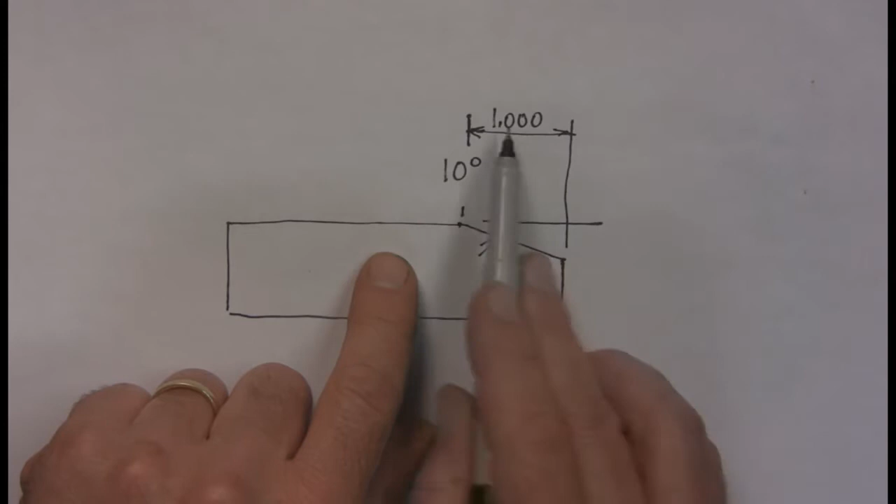Now, what is a ball dimension for? This is an intro tonight, let's talk about that. I've got this block we originally started this whole series with, and these guys want a 10-degree angle here, 1 inch down. How do we know this angle's right? Remember, first I taught you we're going to check it on a sine plate or some sort of gauge, and make sure our angle is 10 degrees.

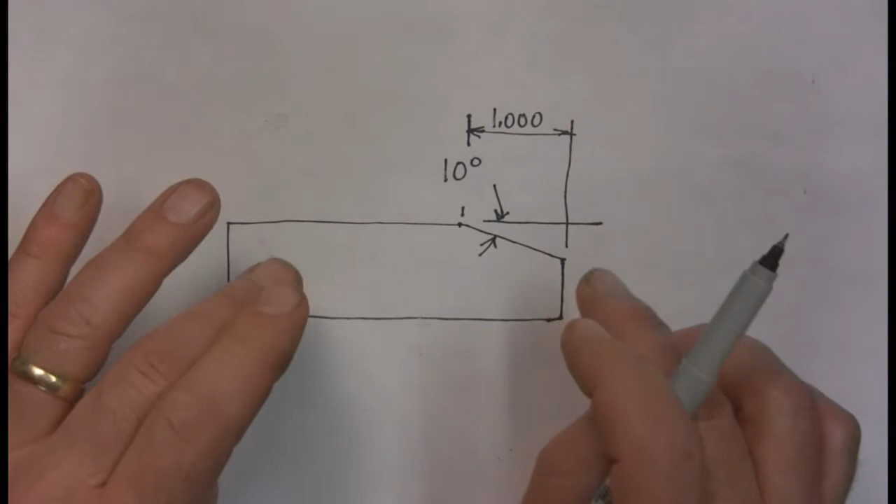Because if the angle's wrong, the ball dimension is going to come out wrong. So the first thing we need to do is make sure whatever we're doing this with—a grinder, a mill, a 10-degree cutter—that we've actually established the correct angle, or the ball dimension won't come out right.

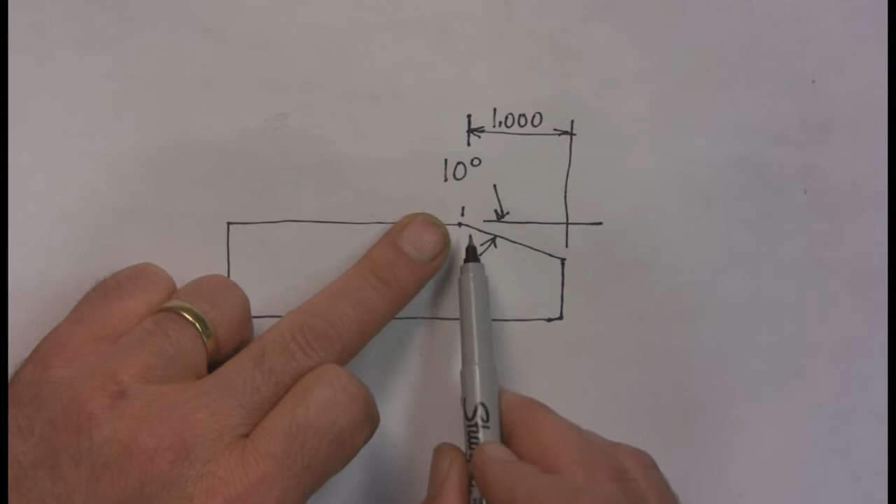So what's the purpose of a ball dimension? Here's what you need to know. How are you going to measure from here to here? Because they want this 1 inch. Now I know what you're saying: I could put it on a comparator, and yes you could. But this edge better be dead sharp, because if you deburr that at all around that edge, you can't find the sharp corner. So that takes away the comparator a little bit, because you don't have a sharp corner left.

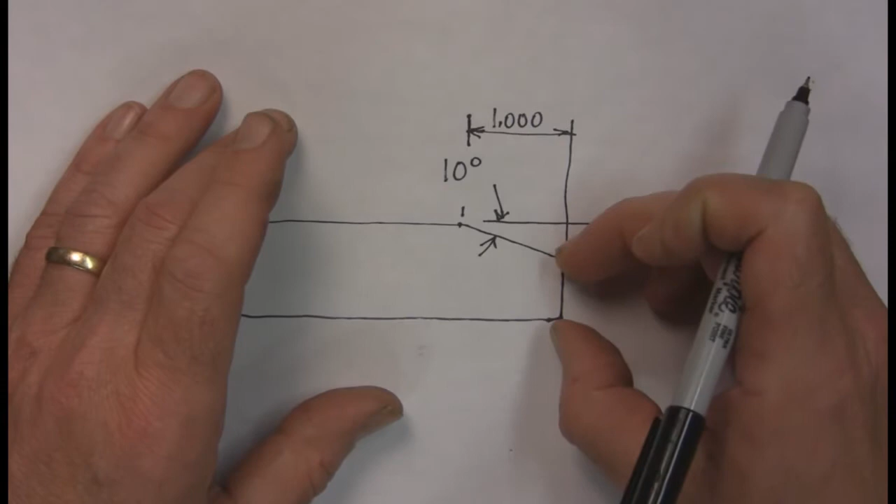To check this angle correctly on a comparator, everything's got to be dead sharp. As soon as you start filing off edges with a hand grinder or something, you've lost that ability. Now, the next way—if this doesn't matter, if this was a chamfer for weld—you could scale this, put a pair of Verniers on it and see, that's about what it is. So here's what you've got to do.

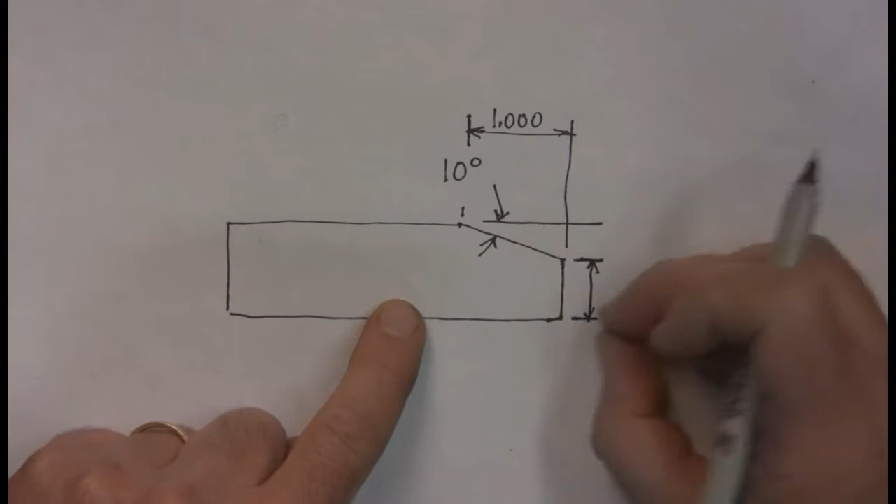First thing, if I were doing this, you have to know a few things. They want this 10-degree angle held here, and to do a ball dimension correctly, you've got to know the thickness. What we really want to know eventually is this dimension—when I'm all done and I check this, what's it supposed to be? That's very simple. Let's go back to our first lesson.

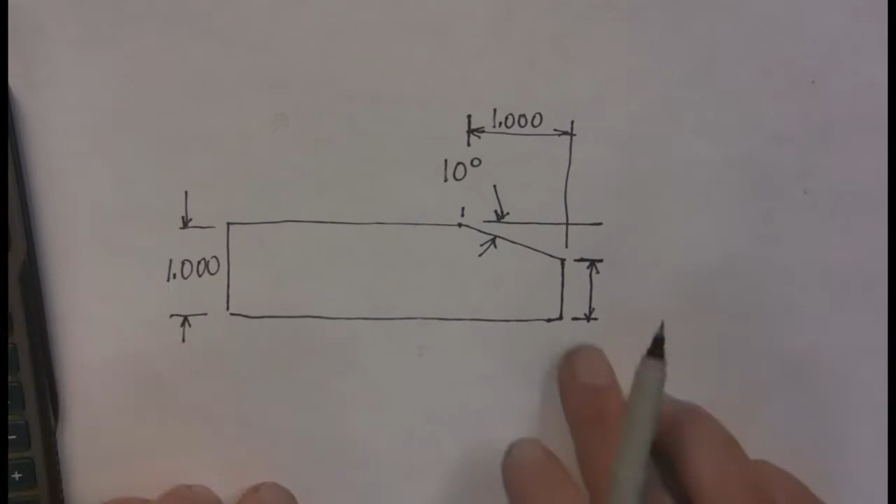So first thing we need to know is the thickness of this part. Let's just call this a 1 inch thick part, okay, that's what it looks like on the print here. So 1 inch thick part, what's left here? Well, we know here's our triangle, right guys? We know we've got an adjacent side, and we know we have a tangent, or a 10-degree angle.

So that's the simple formula to drop in an angle—remember that lesson. So, 10 tangent, and of course I'm going to multiply it by 1 inch, but it doesn't matter because it's the same thing. The drop in the angle is 0.176. So if I hit my plus-to-minus key, that makes it a negative number. Plus 1 inch equals this distance right here. This is what we've got to know: 8, 2, 3, 6, 7.

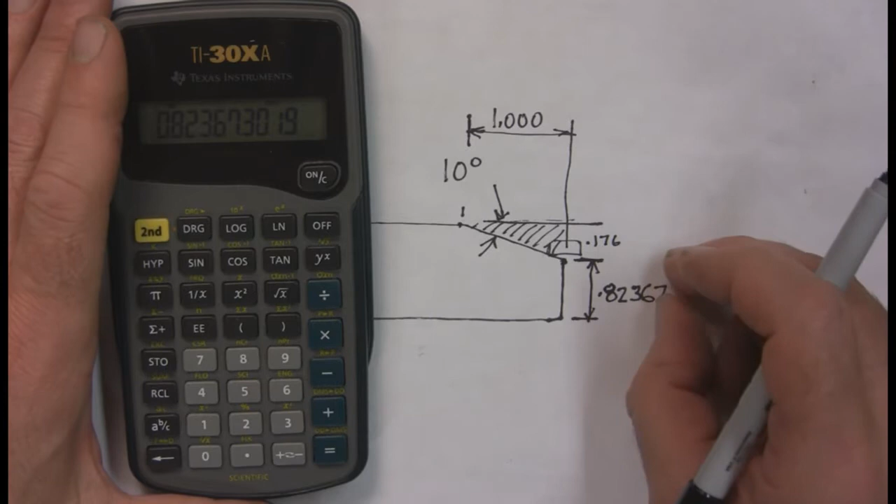How are we going to check that? How are we going to do that? Again, comparator, yeah, as long as you don't roll this edge over. But there's another way to do it. And you can't put a pair of mics over this, because your mics have a thickness to them—they have an anvil, and depending on where your anvil hits, you're not going to get right to that edge. You just can't do it. Again, it depends on your tolerance, but anything closer than plus or minus 10 thousandths, you need a ball dimension, okay?

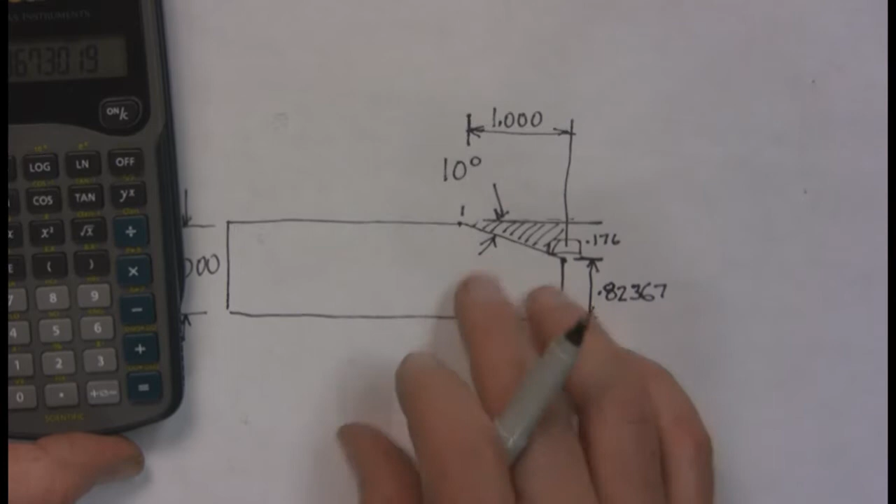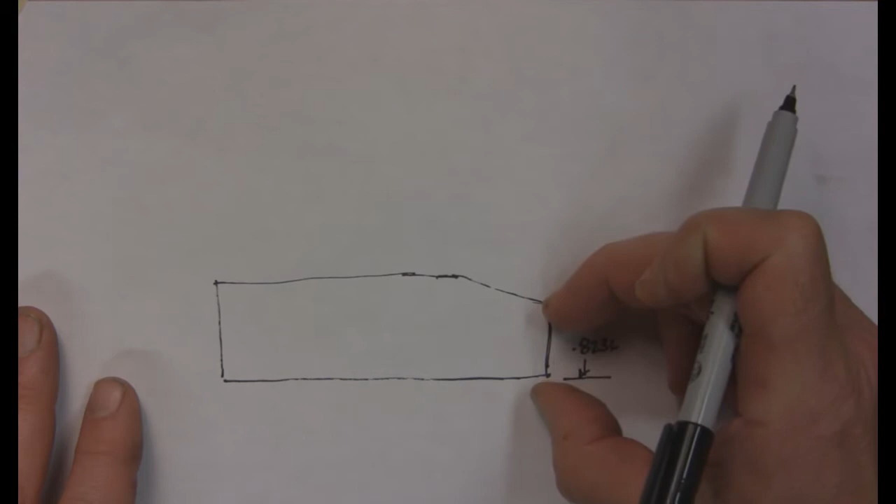So let's take the same part now, and I'll redraw it, and we're going to learn how to do a ball dimension. Back to the redrawn part, we now know this dimension here using our simple trig formula, 0.8236. And we know this is a 10-degree angle, and we've checked it with a dial indicator on a sine plate or whatever, and we know now that this is 10 degrees. Got to be 10 degrees, and you'll understand why—I told you already why you can't check it with a pair of mics or verniers, because you just can't get your mics right to that tip.

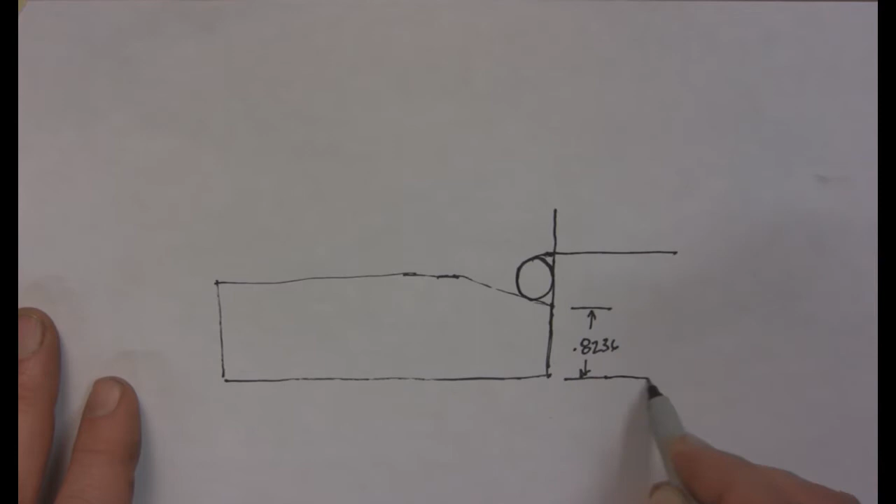So what we do in that case is establish a plane - you put a magnet here and a ball bearing, you put a ball in here, and there's your ball dimension. What we need to know is the distance from here to here. That's how you check an angle correctly. Makes sense? It really should.

Now, if your part's small, you can put a little magnet on there and drop a ball bearing in there, as long as you know the diameter. You've got to know the diameter of the ball - should be nominal, 1/2 inch, 3/8. You can do whatever you want, but a nominal thing.

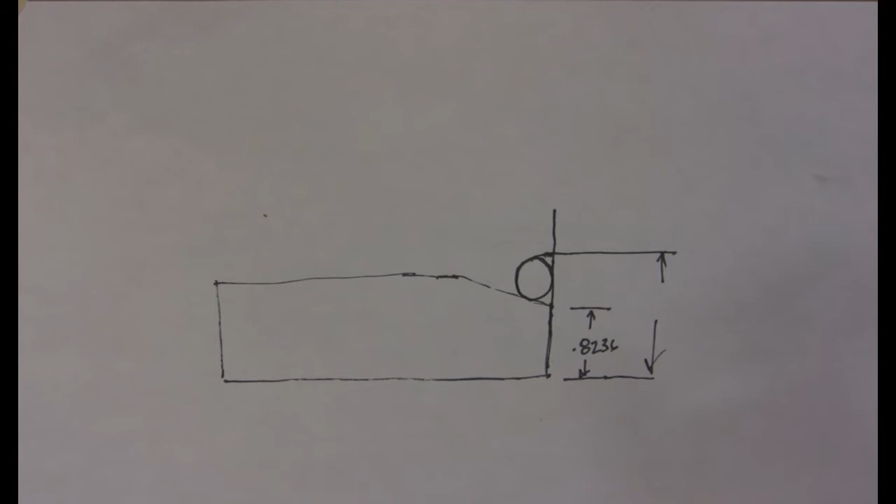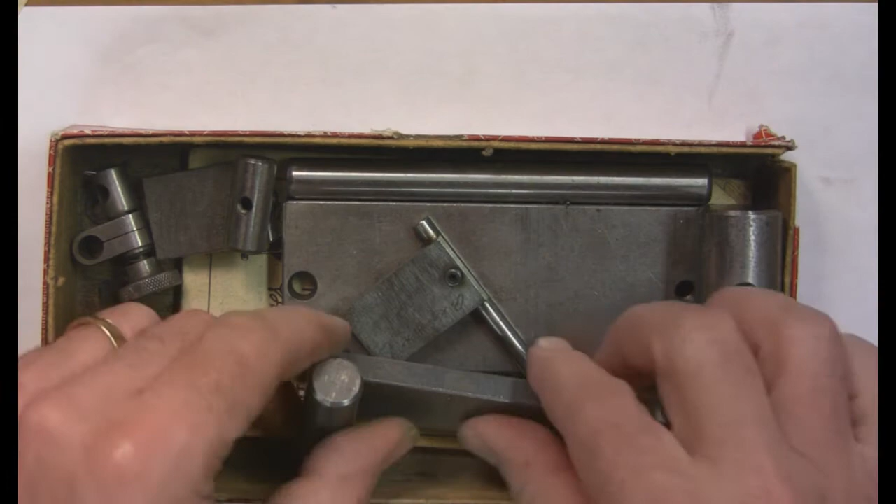So here's the deal, I'm going to show you these. Not too many people get to see these. This is my personal set of ball dimension rolls I've made over the years, different sizes, mounted to a plate. I can put this plate up against something, and then I have something to mic over. I can loosen this bolt and move the plate around. This is a 1/4 inch plate, a little piece of 3/16 steel that I took the time many years ago - looks like about an 832 punched in there.

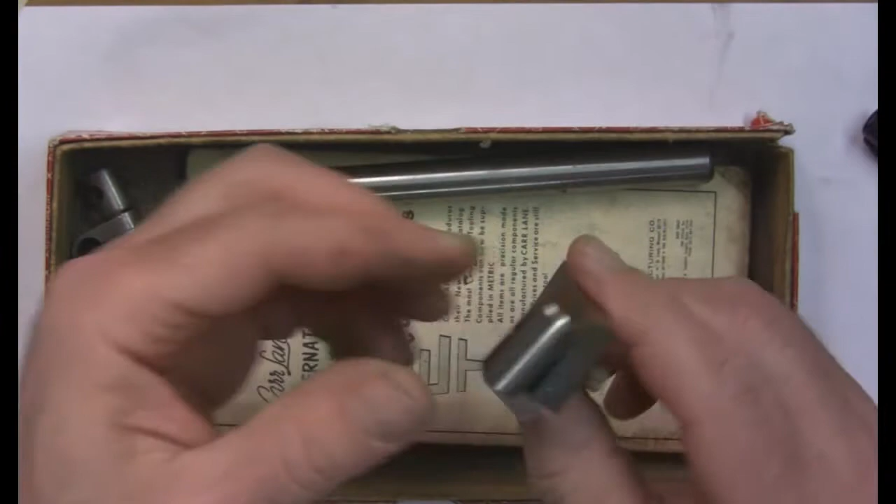This is a bigger one - a 1 inch one, 1/2 inch. I use this one a lot. Okay, so this is my set. Depending on the size of your piece or what you're doing - you can see this one's actually set at a little bit of an angle here because I just loosened it so I had more room for my mics. I've had these for 30 years, okay, and they work really, really well. And there's my old trig book too.

Great, so a couple different things - these are great, these are very inexpensive. This is basically O1 gauge stock. You buy a bar of it, cut it off, and this one's about 3/8 of an inch thick. All you do is - this was a drill rod, because drill rod's got a little case hardened on the outside, but you can drill and tap it. So I've got these up to 2 inches, and I'll go through a lot more of this as we go through the series, but tonight is just an intro.

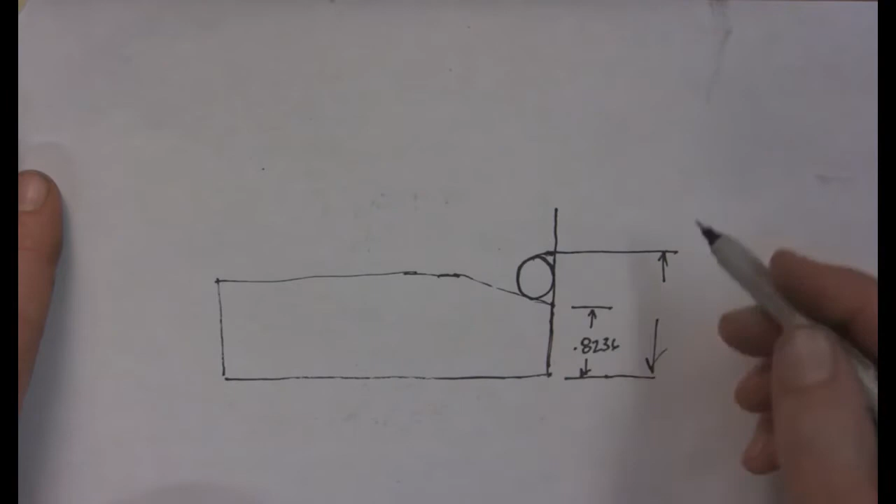So basically what we want to do is find out the distance from here to here. And there's a way to calculate, remember, and that's why I was teaching you guys about your triangles. There's 2 triangles right there you need to calculate - well actually 1, and the one you need to know is this. Now I'm not going to teach you how to do that in this lesson. Don't be mad, I'll teach you, but I'm going to give you the easy way out.

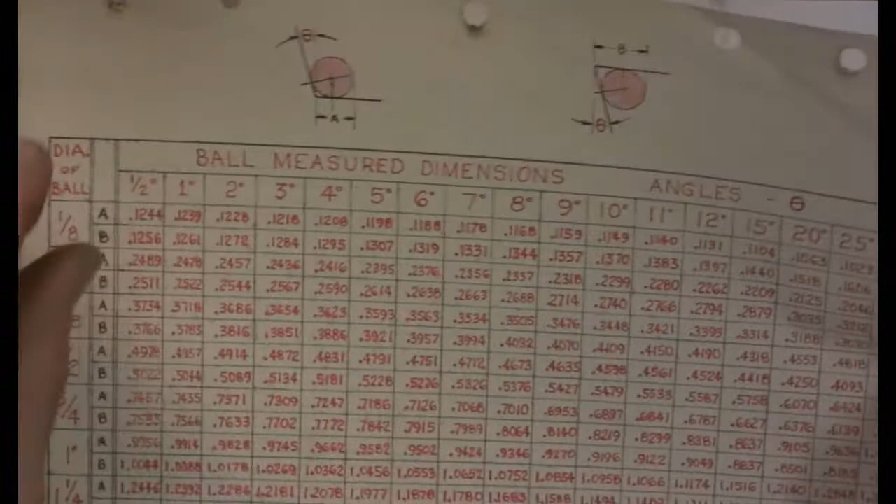This is the chart I'm going to put up tonight. This is a chart on how to find your values for all these angles: 1/2 degree, 1 degree, all the way through 30. It's 1 degree increments through 10, 11, 12, then it jumps to 15, 20. I hand printed this years ago - no mistakes. I came in 1981, so 32 years ago, I did this chart, and it's very accurate.

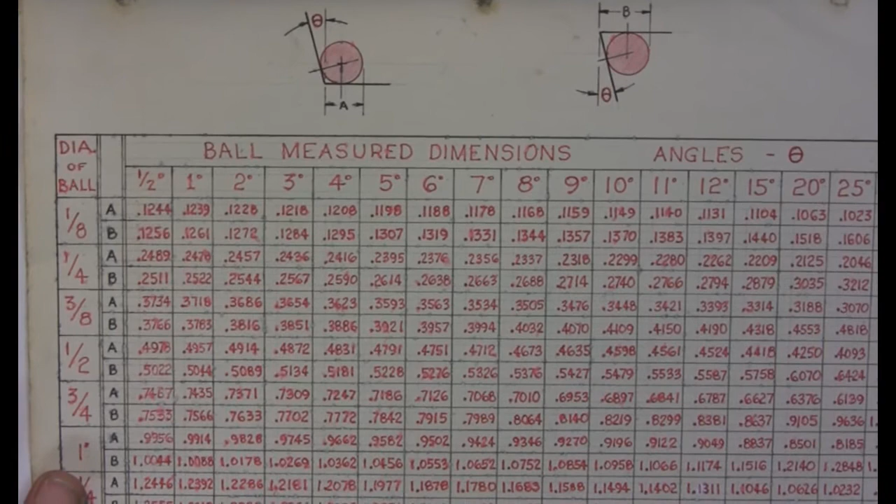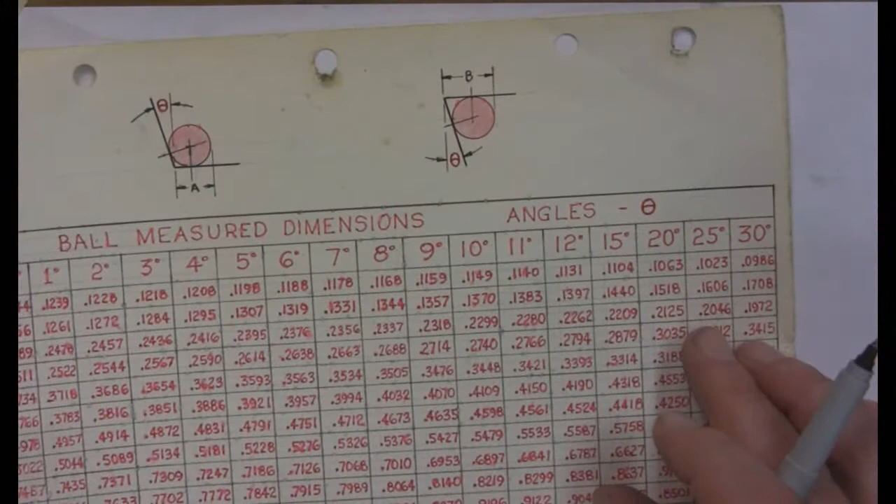And there's 2 different dimensions you need to know, either A or B. So in this case, we were doing the B dimension. And if I flip this around, you can kind of see it - I just want to make sure of that. B. Well, we'll just do it.

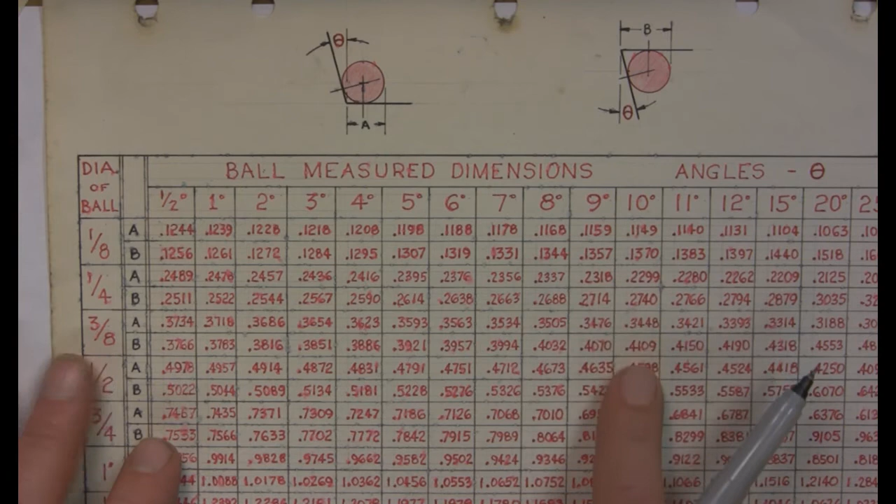So basically, if we know this is .8236 and this is 10 degrees, all I do is go down to 10 degrees - what's the size of the ball I'm using? 1/2 inch. The B dimension is 0.5479. Then just add half the ball, which is 0.250. And now you know it's...

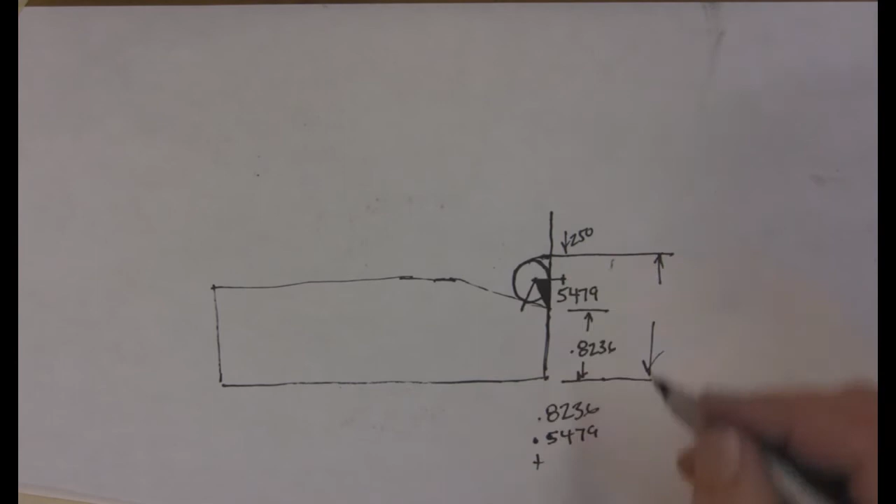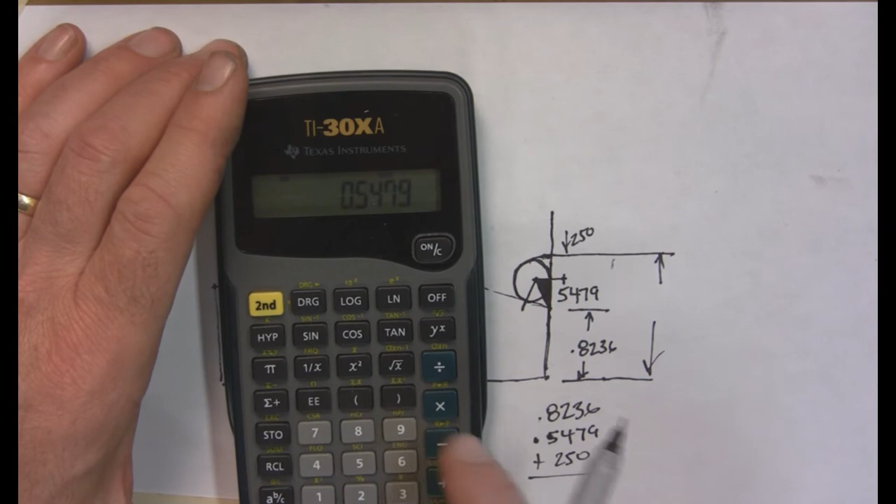0.8236 plus the ball dimension, 0.5479, plus half the ball - boom, 250. Add those 3 numbers together: 0.8236 plus 0.5479 plus 0.250 equals 1.6215. And that's what you should measure across there.

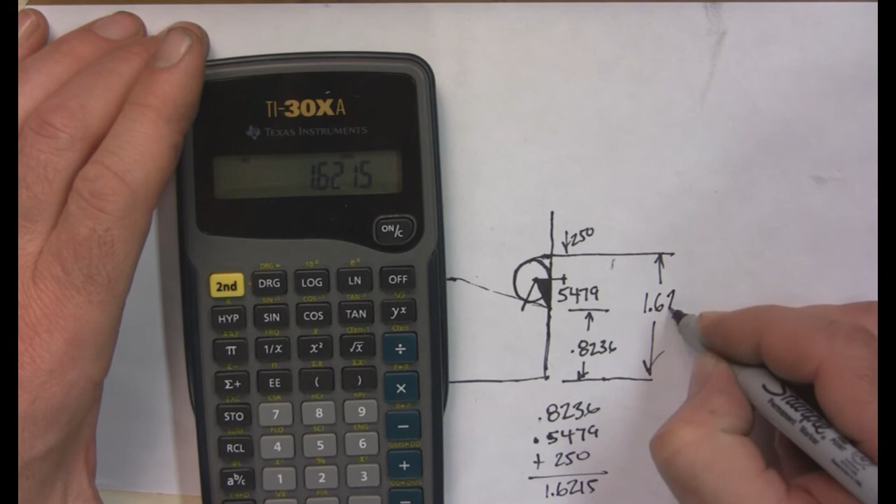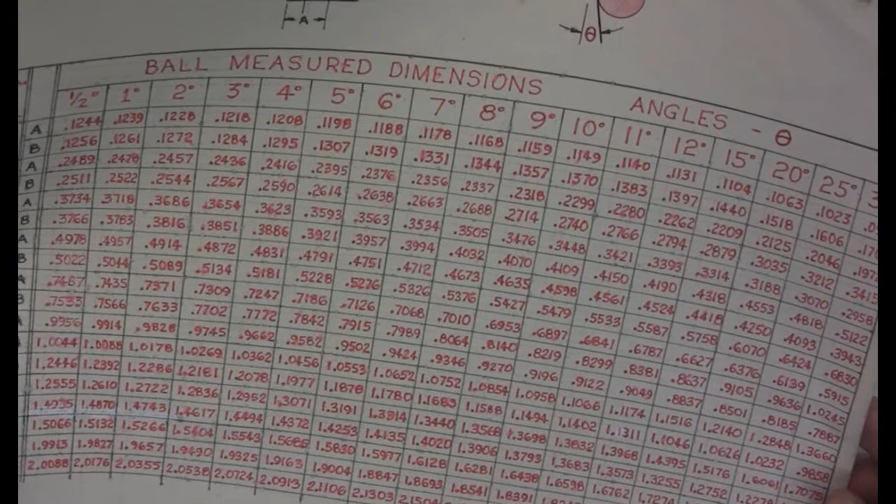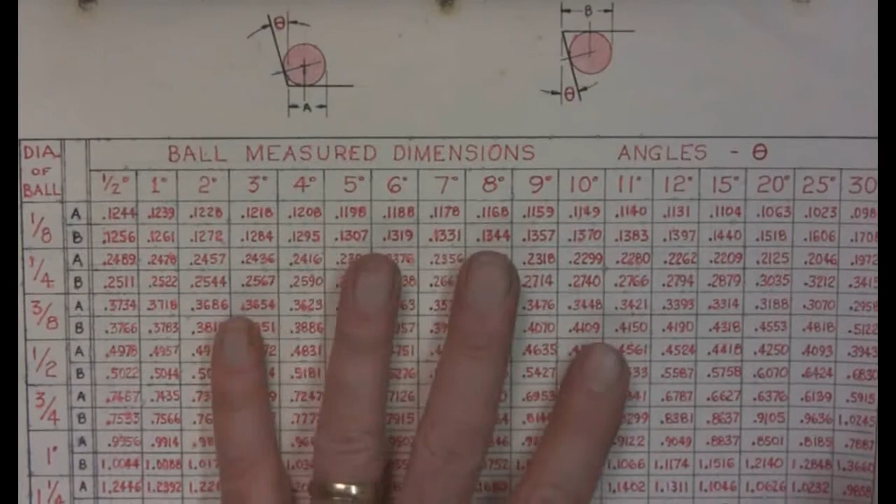Now, that's just quick, but this was an intro, and we're going to really get into this. Now you might say, well I don't need any more lessons, Phil - you just explained it to me and you got this great chart. Yeah, well what are you going to do when you get an angle like 8.218 degrees? You've got to know how to calculate these. These charts are just for nominal dimensions, or the degrees. So I'm going to put this up there, download this, and as the week goes by, I'm going to do more of this for you. But this was an intro to a ball dimension just to show you why it's more accurate.

Okay, miking across this ball will definitely hit a spot here. You need to know where that spot is - we calculate it back, that's how you check an angle. And once you learn this, you are the man.